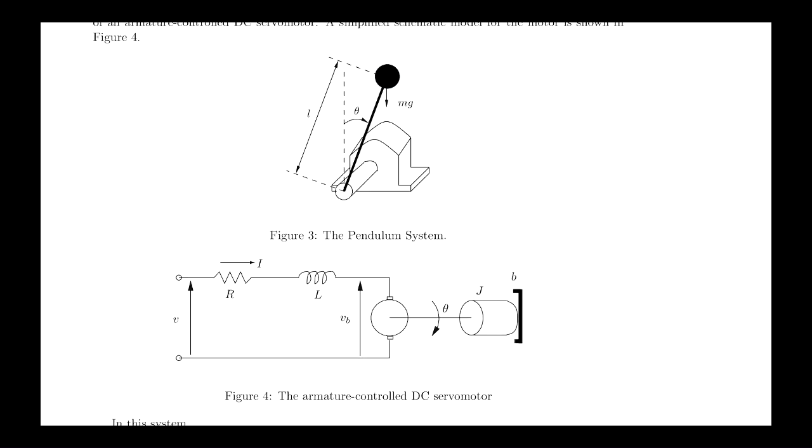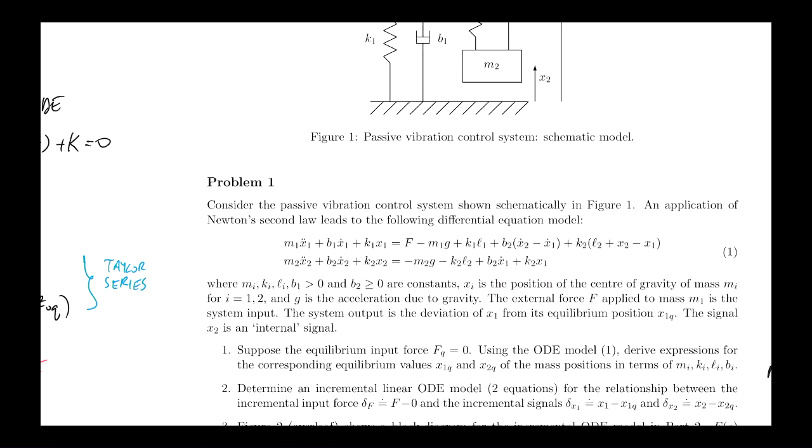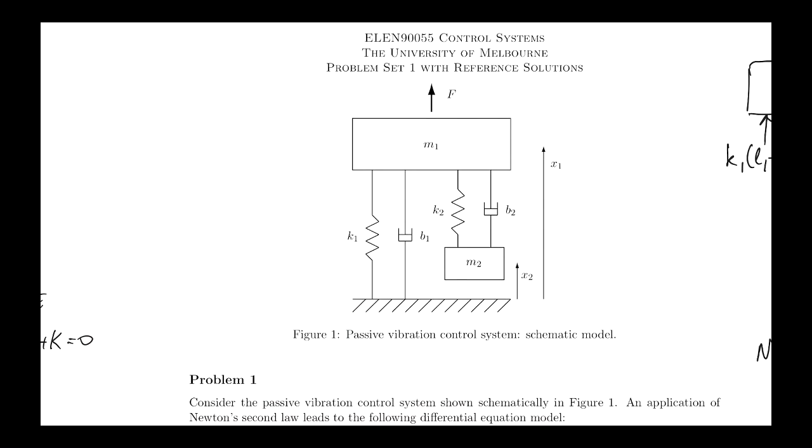Okay, so the plan today is to continue looking at problem set 1, and then we'll move back to part 2 of the notes. Okay, so before we start looking at problem 2, let me just say something about the differential equation models that we were using last time to study this passive vibration control system.

So when we were looking at this model, we said, well, it's not linear, okay? And the reason it was not linear was because of these constant terms here, which we didn't want to carry around as signals, right? Because signals are things that are going to be changing across time, and we're using the differential equation model to describe relationships between things that change across time. Whereas these things are constants, so we didn't want to think of them as signals.

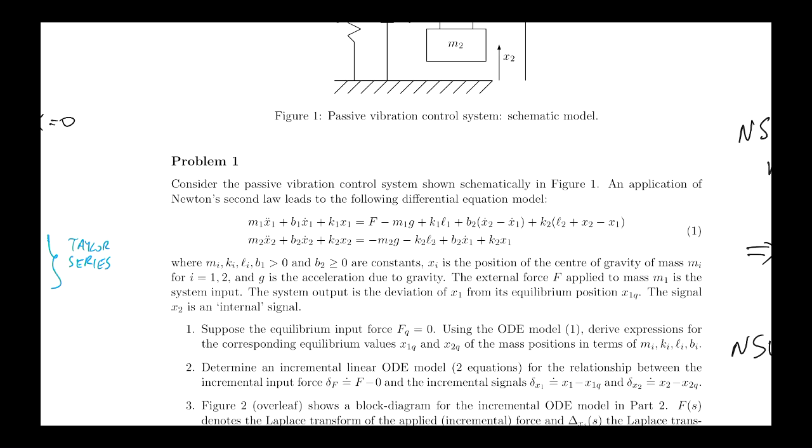And by virtue of these constants being here, these equations are not just scaled sums of the signals and their derivatives, right? We've got an extra constant hanging around, which makes the equations affine as opposed to linear. And when you're working with an affine ODE model, so something that takes this form, let's just suppose that there's only one signal of interest and we're using the differential equation model to just tell us about how that signal behaves rather than its relationship, just for the sake of argument, and that it has this affine form.

So if this were not here, then it would be linear, just a scaled sum of the signal and its derivatives, okay, but it's affine because there's a constant here. Then the algebraic function that defines this differential equation model has this form here, right? It's evaluated at Zn equal to the nth order derivative of Z at time t.

Zn minus 1 is evaluated at the nth minus 1 derivative. Z1 is evaluated at the first derivative with respect to time. Z0 is evaluated at the signal Z. Okay, it will take this form.

And remember, when we're doing linearization, the thing that we approximate is this algebraic function, and we approximate it with the first part of a Taylor series expansion under the assumption that all of the derivatives of arbitrary order with respect to each of these arguments exist. Okay, so that's the form of the algebraic function that we have to approximate when the ODE model takes this form.

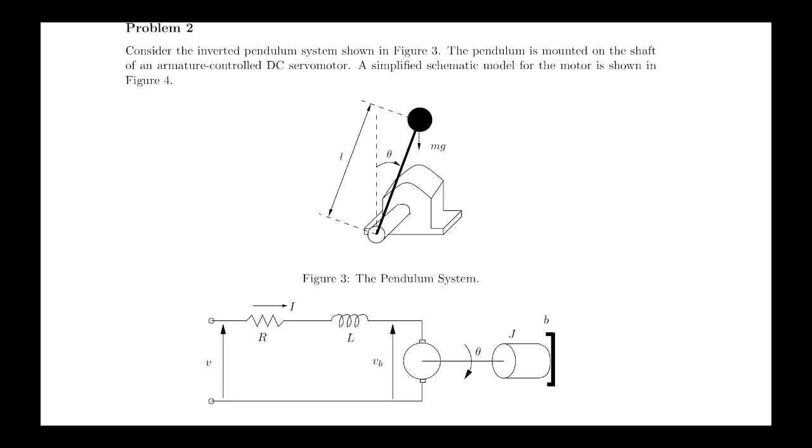All right, to get us there, we are going to use this alternative schematic description of the system that highlights that there is an electrical part of the system and a mechanical part of the system. So this arm and the motor shaft has a moment of inertia. We lump that into J. There's the angular position of the arm. There's some damping because perhaps there's a gearbox in here, and so that can be approximated with some damping. All right, so that's the mechanical side.

Now, the motor produces a torque that acts on the arm. And the torque that acts on the arm will be proportional to the current that flows through the armature windings. Okay, so that of course is the electrical part of the system. All right, we apply a voltage across the terminals.

There will be a current that flows through the armature winding. The armature winding will have some resistance and some inductance. And this represents the so-called back EMF, which represents a physical phenomenon. I'll explain what that is in a minute.

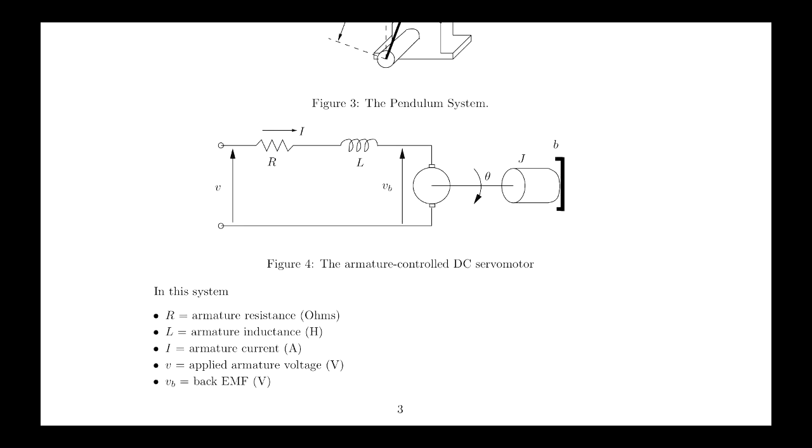Basic models for things like what the voltage drop across a resistor is when there's a particular current flowing through it, and what the voltage drop across an inductor is when the current is changing in a particular way. So I'm going to put all of those basic models together to build a model for the whole thing. And then we're going to linearise and figure out a transfer function that relates the incremental versions of the signals, in a bunch of steps.

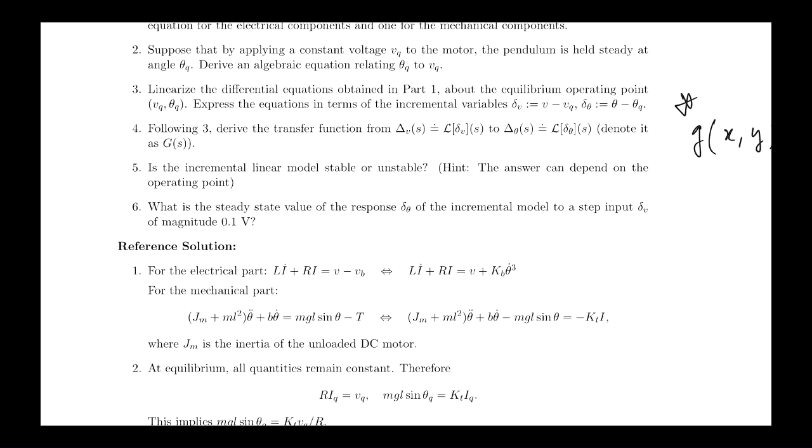So let's just think about the electrical side. The electrical side can be described by a differential equation that looks like this. That simply follows by applying Kirchhoff's voltage law to the loop that's shown here. So the voltage that we apply must equal, whoops, I don't know what happened there, wrong pen.

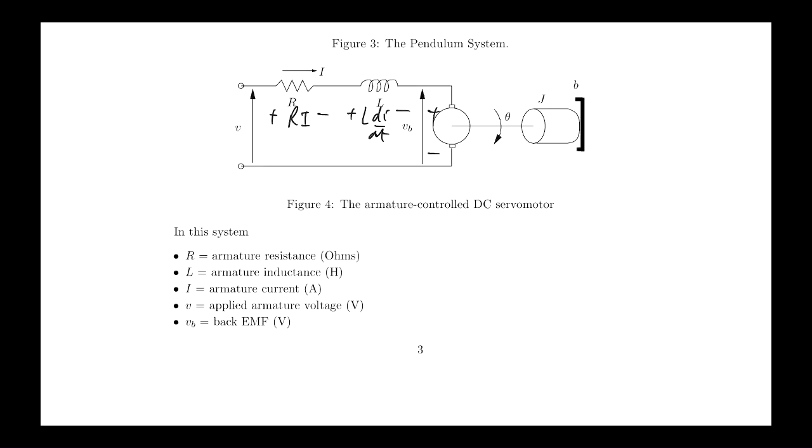The voltage drop across there, which is just R times I, plus the voltage drop across there, which is just L di/dt, plus the voltage drop across there, which is the back EMF. So that's where we get this equation from, saying V equals L di/dt plus Ri plus VB, and I've just taken VB onto the other side.

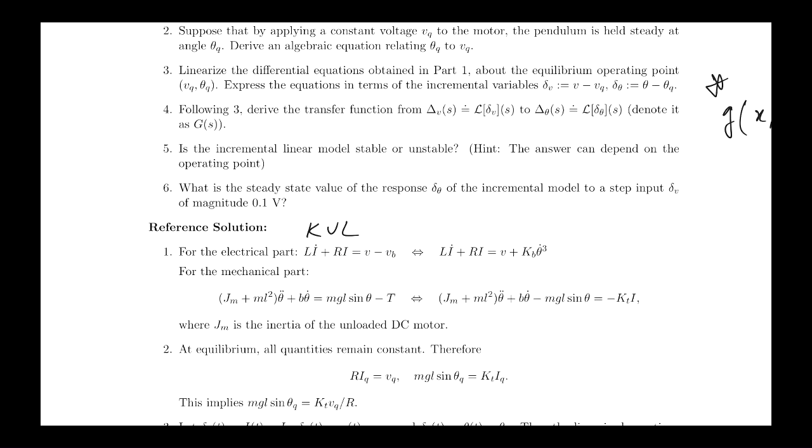Now, I mentioned that we're going to use this model for what VB is. So by the sign convention that we set up, the back EMF will be minus a positive constant times theta dot cubed. So that's where this comes from. It's just substituting in that model for the relationship between the back EMF and the angular speed.

Now we have the mechanical part plus a model that relates the current in the winding to the torque that acts on the arm. So what we're going to use is a version of Newton's second law for angular motion rather than linear motion. And that just says that the moment of inertia times the angular acceleration will equal the net torque. It's like saying mass times acceleration is the net force, but it's just angular motion now.

So, this is the moment of inertia of the inverted pendulum. It consists of two parts. This part is the moment of inertia for the unloaded DC motor, so with the arm detached, just the rotor. It has mass, so it has some moment of inertia. This is the moment of inertia of an arm of length L. So that's the total moment of inertia. And now we need to set that equal to the net torque.

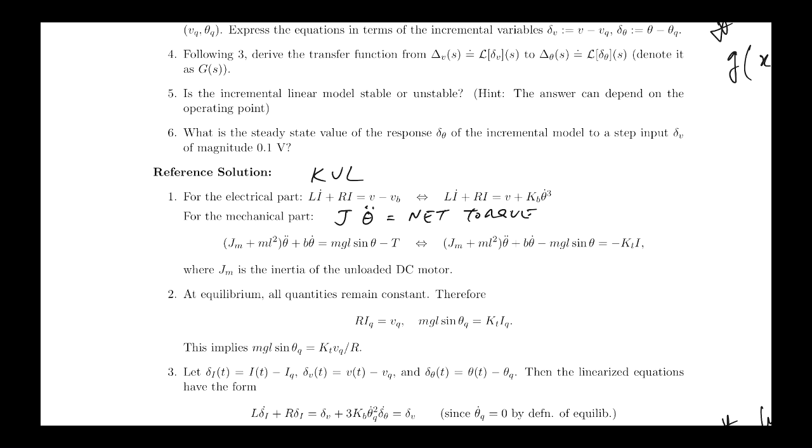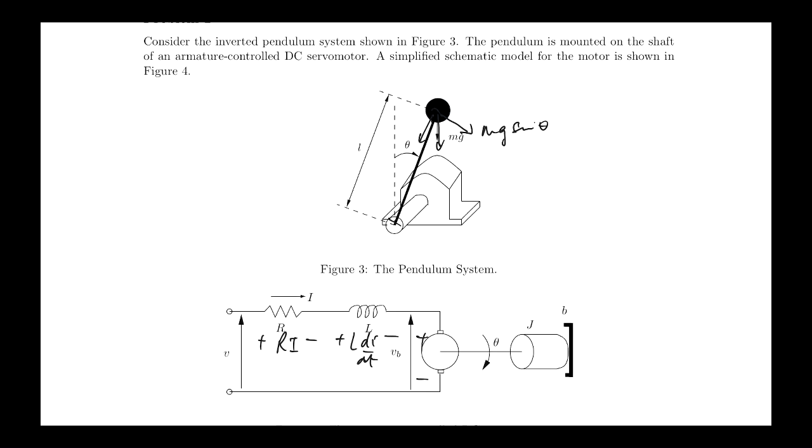This is the torque that acts on the arm because of gravity. So gravity acts down like this. There will be a component in the direction of the arm and a component in this direction. The component in this direction will be mg sine theta. Times the length of the arm gives you the torque due to gravity acting on the mass at the end of the arm. So that's where this term comes from.

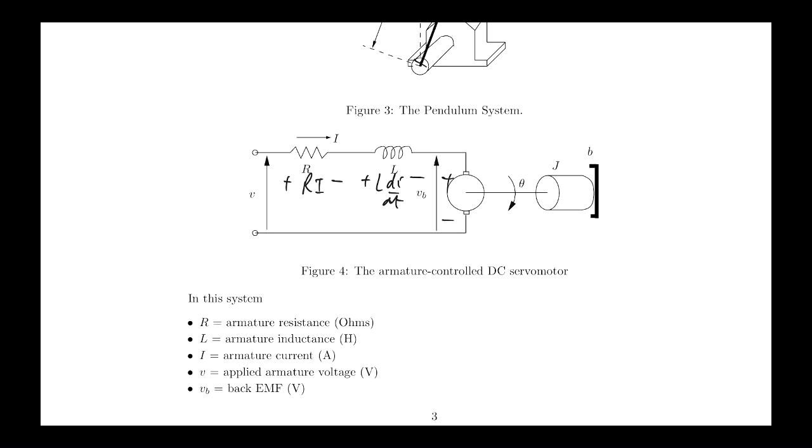And then there's this term here, which if we took it over this side would be minus b theta dot. And that models some viscous damping, perhaps due to there being a gearbox. And it, like the damper in the previous example, opposes the motion, which is why it's minus b theta dot if we take it to the right-hand side of the equation, but if we take it onto the left-hand side, it becomes plus b theta dot.

And to go from here to here, we're just replacing the torque produced by the motor by its relationship to the current in the windings. So that's where those two equations are coming from.

They're differential equations that describe the relationship between signals of interest. The signals of interest are the current in the winding, the voltage across the terminals, and the angular position. And we've got two equations that are describing the relationships between those signals in terms of those signals and their derivatives. So they're just two equations that are describing the relationship between all of those signals.

Now, part two is about saying, well, characterise the possible equilibria. At equilibrium, all of the signals are constant. That's what the definition of equilibrium is. The equilibrium constants for all the signals still have to satisfy the differential equation model. But of course, all of the derivative terms in the differential equation model at equilibrium are zero because the derivative of a constant is zero.

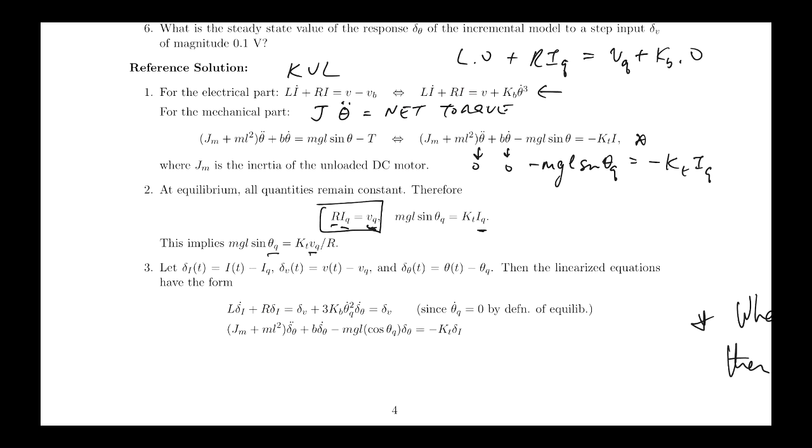So, the linearization of this guy here will just be L delta I dot. This guy here will be just R delta I. This guy here will be delta V. So really I'm using this, right? Well, I'm using it like here, where I'm putting the delta value here and relying on this being some equilibrium value that will balance out the equilibrium values for all the other terms.

This is the cubic one, which we saw linearizes like this, and we get this. But it's important that the derivative term in the linearization gets evaluated somewhere, and we're evaluating it at the equilibrium value for theta dot. But the equilibrium value for theta dot is just 0 by definition, right? So that term goes away.

So really what we should be writing here is this is L times the equilibrium value of delta I dot, and this should be R times the, that should be I. Let me rub that out, start again. So I should be adding to this term here L IQ dot, but of course that's 0. I should be adding to this term here R IQ, so that I can write delta here. I should be adding to this guy delta V, I should be adding VQ.

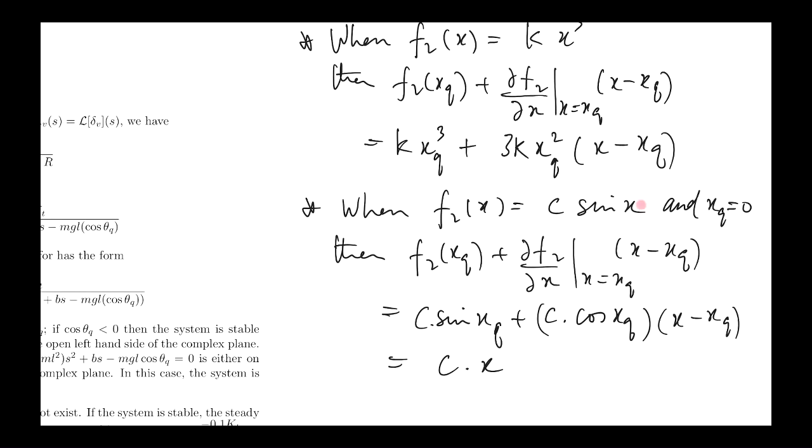And I should be adding to this guy KB theta dot Q cubed. But we know that that's 0, and we know that that's equal to that, and so they cancel each other out, and we're just left with what's written there. We can do the same thing to the other equation. And we end up with this term here because of the way that sine linearizes. So it's very mechanical if you approach it in a systematic way.

So now we have these linear models. We have L delta I dot plus R delta I equals delta V. That is a linear differential equation that relates delta V and delta I. So we could just take the Laplace transform of both sides of that equation. Remember, the Laplace transform is something that you do to signals. Well, this is just a signal made out of the sum of some other signals. So we can apply the Laplace transform to that. But if these signals are equal, then the Laplace transform of this must equal the Laplace transform of that.

So when we take the Laplace transform, we get L times S delta I(S) minus delta I(0), plus R delta I(S). So that's just taking the Laplace transform. And that must be the Laplace transform of the other side. And we're just using capital letters to represent the transform. Now, it would be reasonable to assume that we're starting at equilibrium. And if we're starting at equilibrium, that's 0. And so we just get (SL plus R) delta I(S) equals delta V(S).

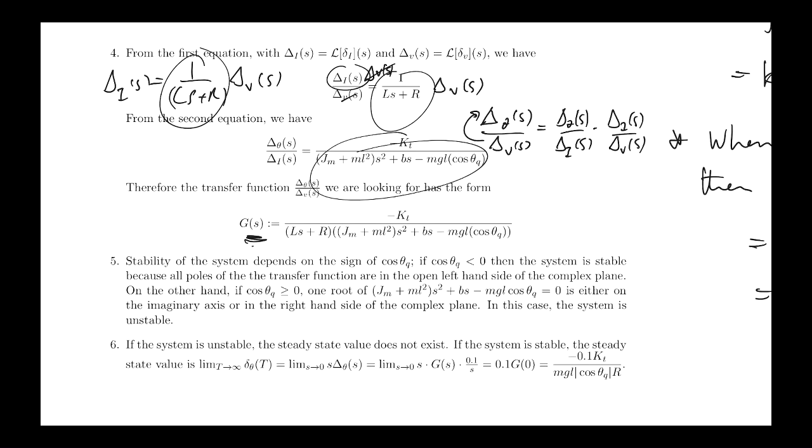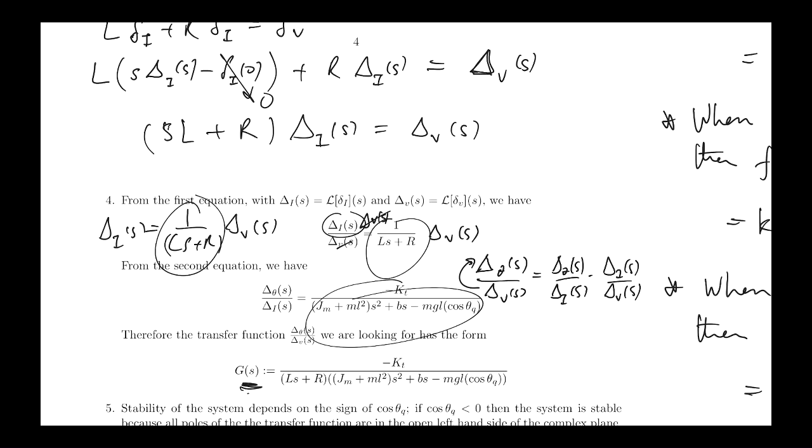No? And the advantage of going to the frequency domain is that things just become algebraic. I got to this by just algebraically manipulating this equation. Right? If I divide both sides by this, that's what I get. So the manipulation of the models becomes purely algebraic. That's the big advantage of going to the frequency domain. And in the end, we end up with these simple models that relate quantities of interest. The relationships correspond to multiplication by a transfer function. Okay? All right, so let's go back to part 2.

Okay, unfortunately, in the last lecture, when I was trying to cover all the properties of Laplace transforms, I forgot to show you this slide here. It tells you about a relationship between the final value of a signal, so the value taken by a signal as time approaches infinity, when that is a finite value, and its Laplace transform. So if you know that your signal in the time domain goes to a constant value as t goes to infinity, then that constant value will be equal to the limit as the real part of s goes to 0 from above of s times the Laplace transform of that signal. So that's sometimes called the final value theorem.

Here's a proof for it when we know an exponential bound on how y approaches its final value, right? So we're saying y is a function of time. We know it approaches a final value. Let's call that y infinity. And we have this exponential envelope that tells us how it approaches the final value. And given such information, you can prove this result. All right, so that's the final value theorem.

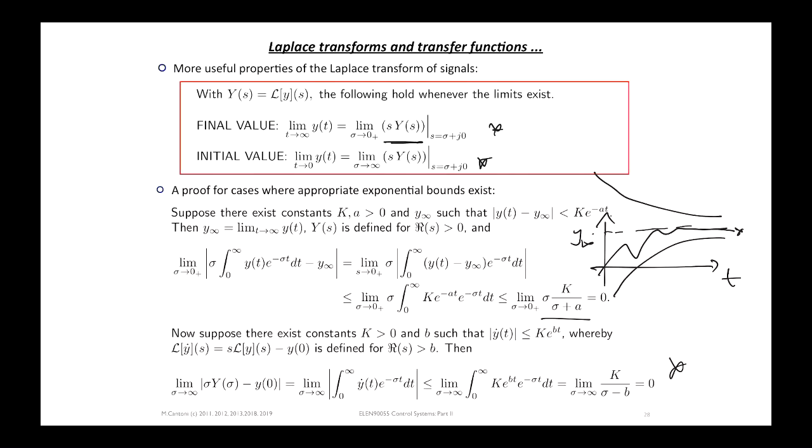All right, so now let's look at another example that's related very closely to the thing we just looked at from the problem sets. So this is a DC motor driving some inertial load. There's an electrical part and a mechanical part of the system. The linearised motor equation tells us that the torque produced by the motor is proportional to the current flowing through the windings. The current flowing through the windings produces a magnetic field in proportion to the current that interacts with another magnetic field to produce a torque, right? And here's how we're modelling that relationship. Newton's second law for angular motion tells us that the moment of inertia times the angular acceleration is equal to the net torque.

Right? The torque produced by the motor relates to the current in the way shown here, and this models some viscous damping. Okay, the viscous damping always resists the motion, like pulling a damper through the fluid inside the box. Right? If I pull this way, it's pulling back. It's opposing the motion. That's why we end up with a minus sign there.

Okay. Kirchhoff's voltage law around here just tells us that the voltage across the terminals here must equal the drop across this plus the drop across this plus the drop across this. The drop across here is telling us about the back EMF. All right? So we get this differential equation model. This is just showing what those look like in the frequency domain. All right?

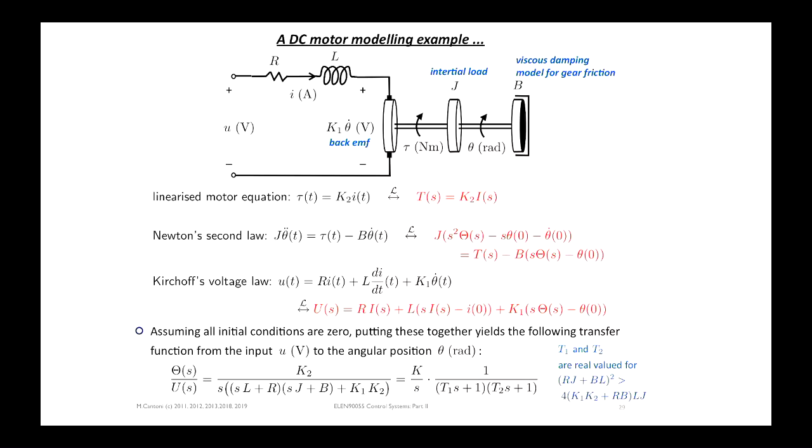It's cubic. All right? And all I'm doing here is re-expressing this divided by this quadratic in a new way. This is still a quadratic. Times S gives me the cubic object on the bottom. Right? I've just reparameterized it, in a way that's convenient, as I'll show shortly. So how do you go about finding the new parameters, K, T1...

Whoops, what happened there? What's happened? Okay. That's convenient. Let's go there, and then go there. There we go. I don't know what happened there.

Sorry about that. So how do we go about finding these new parameters, given the original parameters? Right, the original parameters are the motor constant, the viscous damping constant, the inductance, the resistance, the moment of inertia, and so forth. Sorry, that was the back EMF, that's the damping one.

So you find these by just taking this equation, and then getting this equation from that by taking this up to this side and this up to this side, right? So I get a cubic equal to a cubic. This cubic involves mainly the new parameters, and this one mainly involves the old ones. So I can find equations describing the new parameters by just matching coefficients.

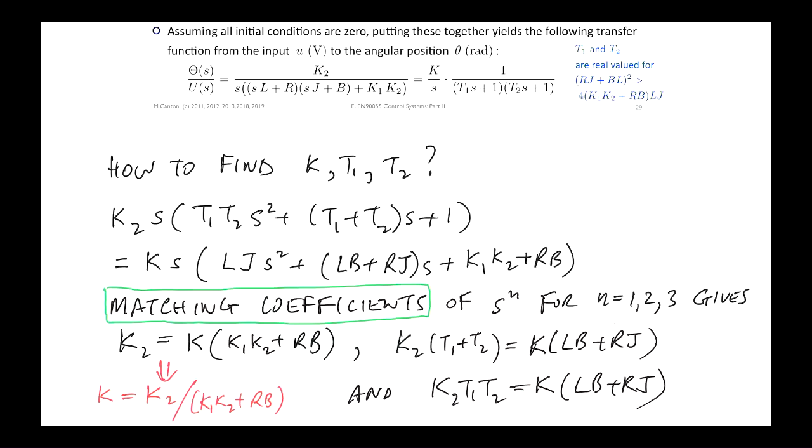Now, you end up having to solve a quadratic equation, and that may not always have real solutions. But if this inequality holds for the original parameters, then the new parameters T1 and T2 will be real valued. So when you solve these two equations for the two unknowns, T1 and T2, you'll get real values. So it's just a reparameterization, and it follows by some simple algebra.

So now that we have this reparameterized version of the transfer function, we can get yet another representation of that transfer function as a sum in this form. And the advantage to having a sum in this form is that we know that things that look like this in the Laplace domain look like exponentials in the time domain.

So we saw that e to the minus at looked like 1 on s plus a. But 1 on s plus a is, you can take the a out the front and you get 1 on a s plus 1, which now looks like this form here. And it's why you get the 1 on T term in the exponential. So the advantage to splitting up like this as a sum of objects that look like this is because we know what these translate to in the time domain.

Things like this, with a first order polynomial on the bottom, take us to exponential signals in the time domain. This guy here, we saw, is just really the Laplace transform of a unit step function scaled by the constant a1. So remember that this is the transfer function. But the transfer function is the Laplace transform of the impulse response. That was something we saw in the last lecture.

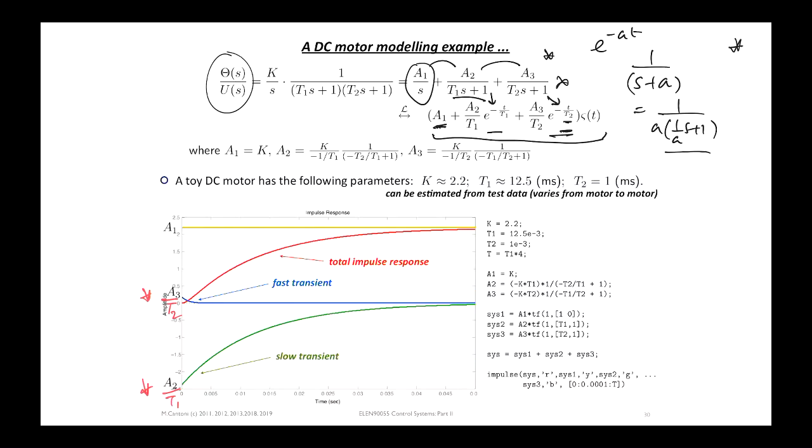How does partial fraction expansion work? Well, it works like this. It's not hard to work out what those parameters are. So let's just work with something that looks like this, where we've got a factor like this. When we've got something like this, we can always represent it as the sum of two bits. The first bit has this on the denominator. The second bit has this on the denominator. When we add those two things together, we get something with the product of these things in the denominator.

And on the top, we'll get a times d plus m times this factor here, and that must equal n of s. But instead of trying to match coefficients, if we just rewrite this expression like this by taking the 1 on Ts factor outside, then we see that in order for this to be equal to this, this must be equal to this, which is all I've written down here.

And now if we evaluate this at s equals minus 1 on T, you get 0 here, which then tells you that a must be this evaluated at s equals minus 1 on T. So that gives you effectively the cover-up type rule. So to get this coefficient here, you just multiply this by s and then evaluate it at s equals 0. And that gives you a1 equal to k.

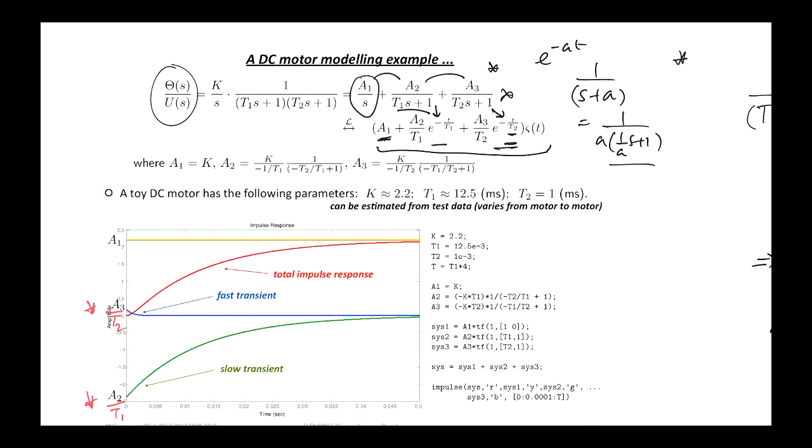Well, it's just the sum of these exponentials. They're shown in this picture here. Each component. Just bear with me for 5 seconds. So you get the sum of these components. The speed with which the exponential things decay depends on this